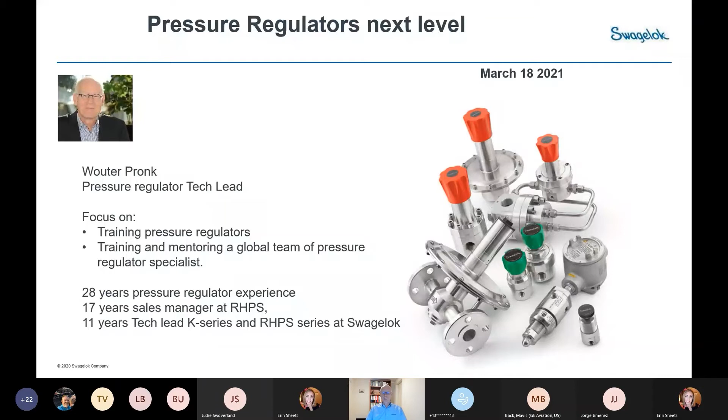So today we will talk about how to select correct regulators and things we have to be aware of. Is there a difference between liquid and gas? Of course we know what liquid is - if I drink my tea, that's a liquid. Regulator preventive maintenance is also important to know. We'll talk a bit about tank blanketing, and I'll show a little about the RHPS series versus the K series. I'm not going to do a sales talk - that's a job done by your sales and service center - but I just want to put some of our regulators in the spotlight so you can remember them.

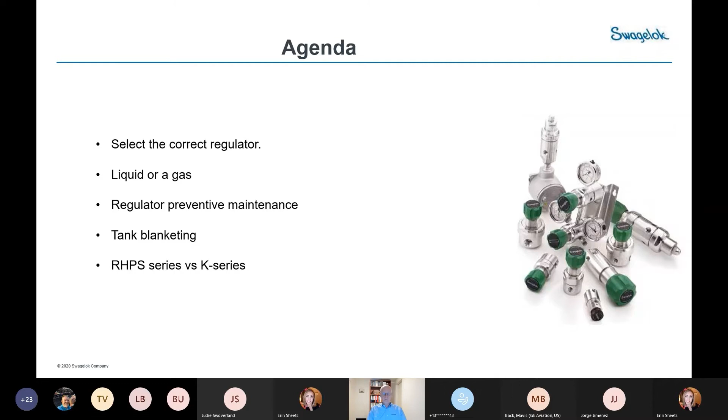So if you select a regulator, what is your selection criteria? It's very important that you select a regulator based on correct information. That sounds weird, but very often when talking with a customer about an application, I hear the word 'I think.' And if we start selecting a regulator because we think we know what is correct, basically we should know the correct process information - pressures, temperatures, flow, material compatibility - that's all very important.

It's also important that we know what we want to control. Do we want to control the upstream or the downstream system? Is that regulator reducing high pressure to low pressure, or is it the other way around? It's nice if you understand a bit about the natural behavior or performance of a regulator. We all wish we had a regulator connected to a high pressure source, set at 5 bar, which gives a fluent 5 bar outlet pressure. Unfortunately, it is possible, but then we have to do a lot of extra things. If we talk about standard regulators, we will see lockup, droop, supply pressure effect, and we will go through them.

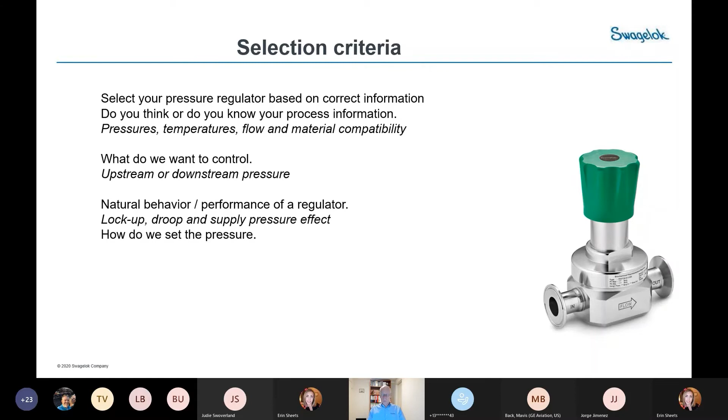So before we start talking about regulators, I always try to explain how a regulator works. The principle behind it is basically balancing of forces. Inside a regulator, we see several forces. The first force is the one we all know - I don't have the correct regulator in front of me, but if we turn the set knob, we compress a spring. That's the force everybody knows, the force everybody will recognize.

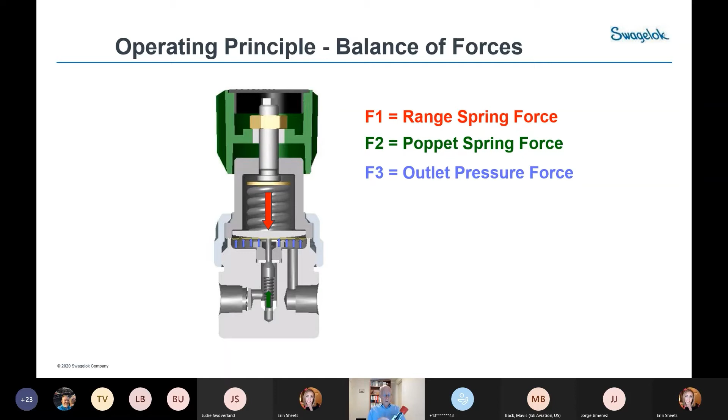Then we have the poppet spring force. Inside the regulator is a poppet, and that poppet should be against the seat. It can be done by a spring, and in the way we do it, it can be done with a tight diaphragm. But in our regulators, there is a force created by the spring - that's F2. And then we have a very important force - that's the force which is basically the outlet pressure, the force we try to achieve, which is pushed against the diaphragm. So the diaphragm will see the outlet pressure.

And then there is another really important force, that is the inlet pressure force. You can think about the situation where your high pressure inlet, which is 6,000 psi, is going to a regulator. The regulator will receive that 6,000 psi at the inlet, and it will push the poppet into a seat. So there will be pressure over there, and over the area of the seat, there will be created a pressure. That's what we can calculate by multiplying the area with the pressure, which creates a force.

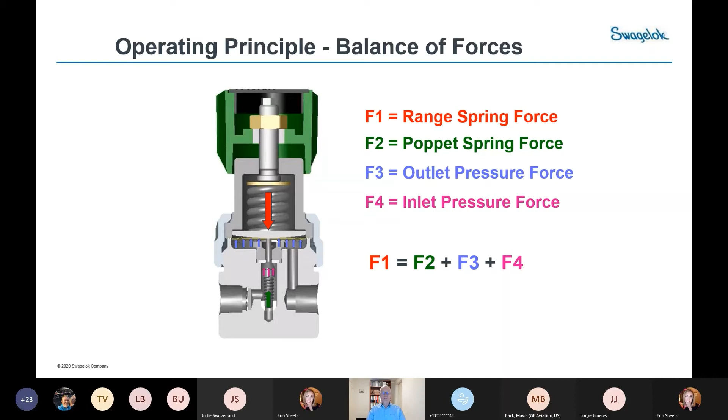All these forces should be in balance. So F1 is equal to F2, F3, F4. If we change one of the forces inside the regulator, something will change. And I keep telling you, if you are on top of this equation, you can explain most of the performance issues within the regulator.

Very often we like to use the regulator in the flat area of the flow curve, or maybe I should say a relatively flat area, because there is an effect called droop, which makes the flow curve a little bit sloped. So we start at the lock-up area, then we run into the droop area, and then we run into the choke flow area. That's really the end of the capacity of a regulator. You don't want to be there. If you want to use a regulator at that point, it's better to buy an orifice.

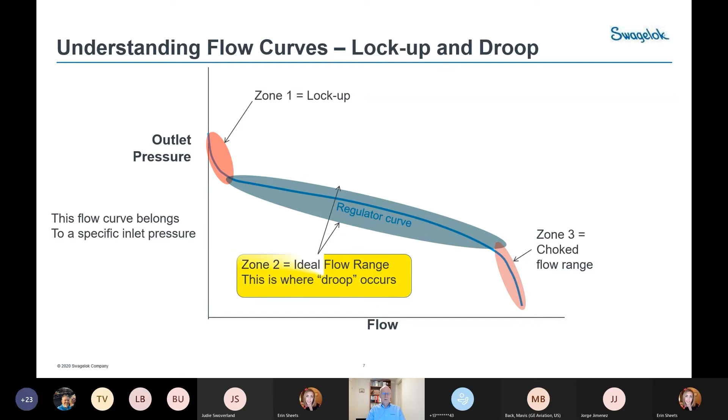And so all this information brings us to the point where we can start selecting a pressure regulator. And believe it or not, if I ask in a conversation what is your process data, and I write it down in my notebook and start working on it, or I give you this form and let you write down all the information we need - before you write it down, you will check it. You didn't check it when I was asking it. So basically writing down the information brings us to the point where you give me the information, you sign it off, and we can select the correct regulator.

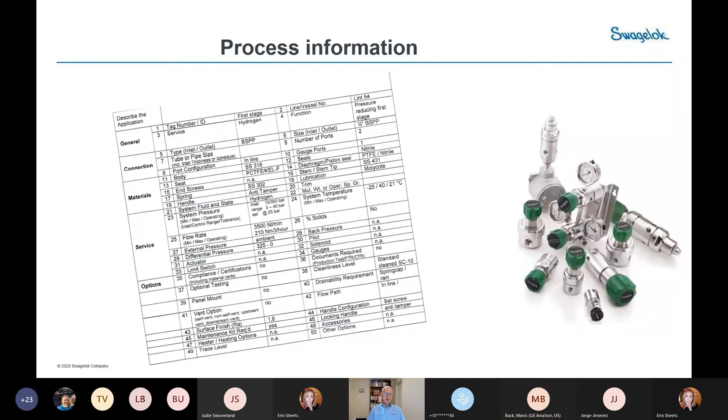Which kind of effects can we see inside this application? So first we can see lockup, and I will go through it. What is lockup? If somebody opens the valves over there, the first effect we will see on a regulator is lockup.

Then we see supply pressure effect. If the pressure inside these cylinders goes down, and you set your pressure at 15 psi, your outlet pressure will go up. So supply pressure down, outlet pressure goes up. It's against your feelings, different than you expect. Normal people, when I started in regulators, I did expect that if inlet pressure drops, outlet pressure will drop as well. But it's the other way around, and it's all to do with balancing of forces.

We will see droop effect in the process. We will see Joule-Thomson effect downstream the regulator because of compression and decompression.

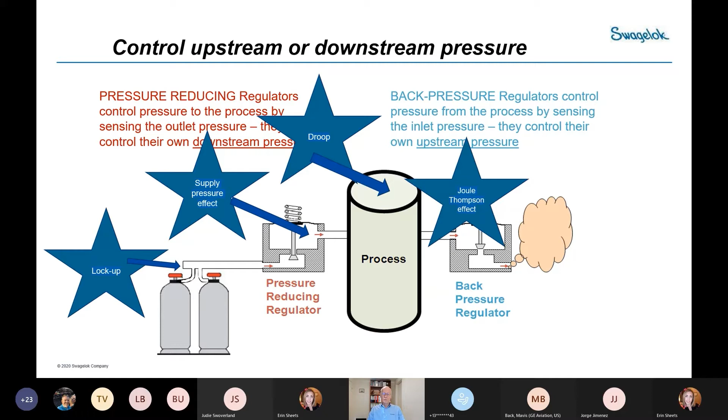So to start about lockup. What is lockup and how can you recognize it? So to show on this panel, you see the regulator which is set at a certain pressure. In this case, it's approximately 15 psi.

This valve is closed at the moment. If I open this valve, this gauge will show that the pressure drops downstream. So downstream the regulator, there will be a sudden drop, and that's what we call lockup. I hope it will work.

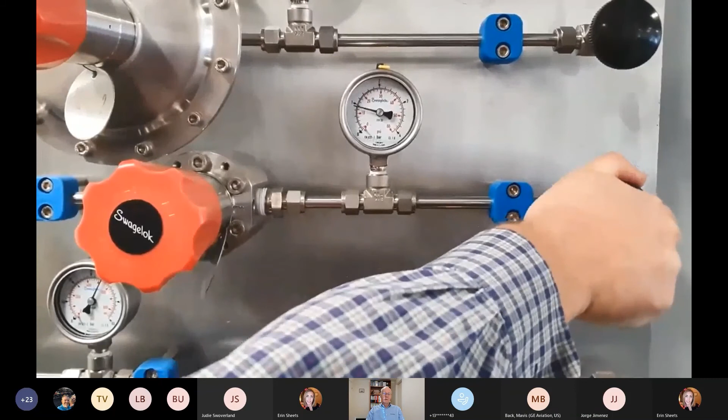So we open the valve, and this is a regulator which is a little bit prepared, so it shows a lot of droop. But this regulator is not broken. This is a normal performance effect which you can see inside the regulator. So we call it lockup.

You can imagine that if you're using a regulator in the lockup area and there is a little bit of flow, because the lockup only shows up with a little bit of flow, that you might have a performance issue in your system.

Where can we find lockup? If you go to the published flow curves, which you can find in our documentation, it's difficult to identify the lockup. If you go for a CTR, like we call it, so customer test report, to be sure that your regulator is doing exactly what you want, we can make this flow curve more precise. And on this one, you can see that lockup shows up and is over at something like 0.15 standard liters in a minute on this specific regulator.

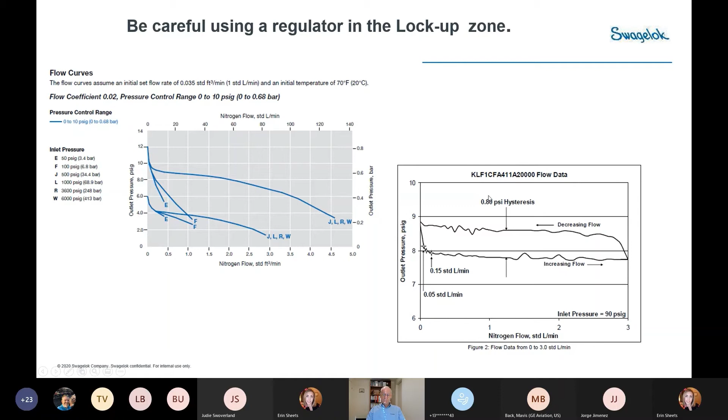You can imagine that if you are working with regulators in an analyzer system and you've got a flow to the analyzer or from the analyzer, which is really low. And I found this example because we also do site evaluations, and I found this example where the flow from the analyzer or to the analyzer was 12 liters per hour, which is 0.2 liters per minute. So you can imagine if this is the only flow which is controlled and set by a pressure regulator, you will have an issue. The pressure jumps up and down, your analyzer gets all kinds of different pressures.

So what is this customer doing? They created a bypass, or they created a little bit more flow. So it's always important to know if there is lockup and the flow is really steady, you will get a steady pressure. If you are fluctuating with your flow, then you also see fluctuation in your set pressure.

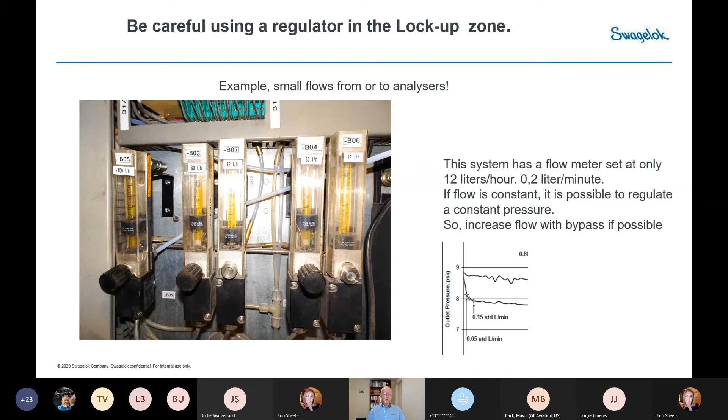So supply pressure effect, inlet dependency. I introduced it already. If the pressure in a cylinder drops, the outlet pressure goes up. Or if your inlet pressure goes up, your outlet pressure drops. So it's a balance. Inlet pressure down, outlet pressure up, and the other way around.

Think about a situation where you are running a process. You've got a cylinder, you start with 200 bar inlet pressure. You want to have 5 bar outlet pressure. Sorry for the bars, I'm mixing PSIs and bars up, but that's a European habit. So if I have a set pressure 200 bar in, 5 bar out, and my inlet pressure drops over time, the outlet pressure will go up.

And if your operator looks at the gauge and thinks, 'Oh, I have to correct this,' then he will turn the knob on the regulator a little bit backwards. So he corrects the pressure. But what if this cylinder is fully empty and he puts a full cylinder in place? What he does, he creates a high inlet pressure, and because a high inlet pressure will create a lower outlet pressure, you already did decrease the setting of that regulator, so your regulator will not give any flow.

So customers on the phone, like, 'Sorry, Swagelok, your regulator is not working well.' If we start talking about supply pressure effect and we explain what you did, you understand it.

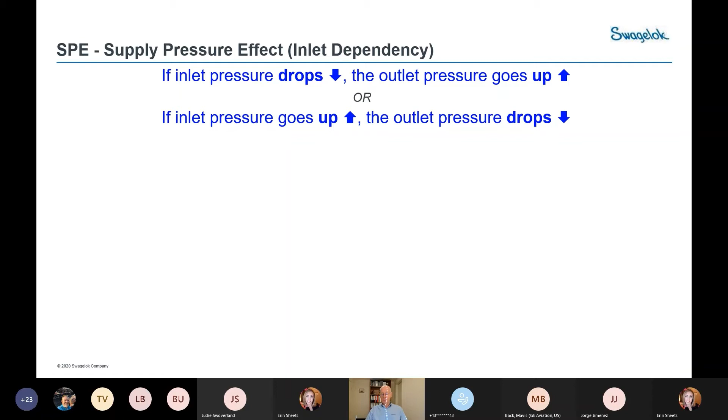So again, it is all to do with the forces inside the regulator. So the F1, F2, F3, and F4 force. So there's something changing inside your regulator. So if one of the forces, and in this case the inlet pressure force, which is basically the F4, that's the force against the poppet.

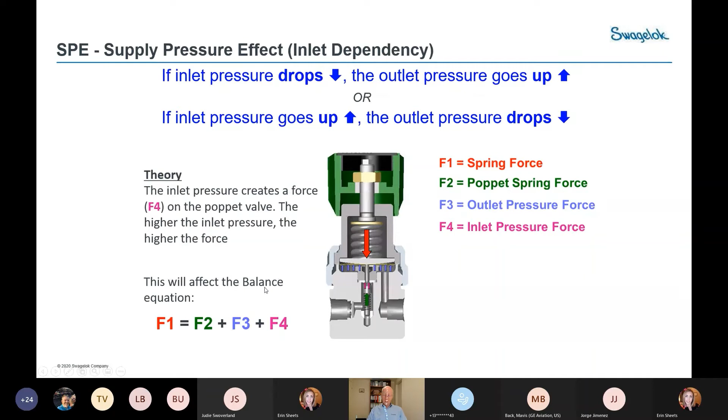If that's changing because your inlet pressure drops, so basically the inlet pressure force, that's number 4, is changing, is going down. I'm not touching the spring, the set spring. So there's only one thing which can change. That's the F3, the outlet pressure force. If this one force goes down, this one should go up, otherwise the balance is gone. So that's a quick explanation of supply pressure effect.

I've got a video which shows this. This is a pressure regulator which has an inlet pressure which declines from 34 bar to 6 bar. Outlet pressure increases from 1.6 to 2 bar. So if you look to the pressures...

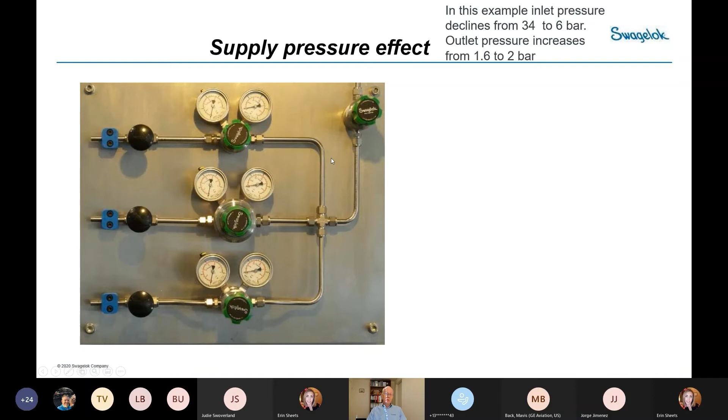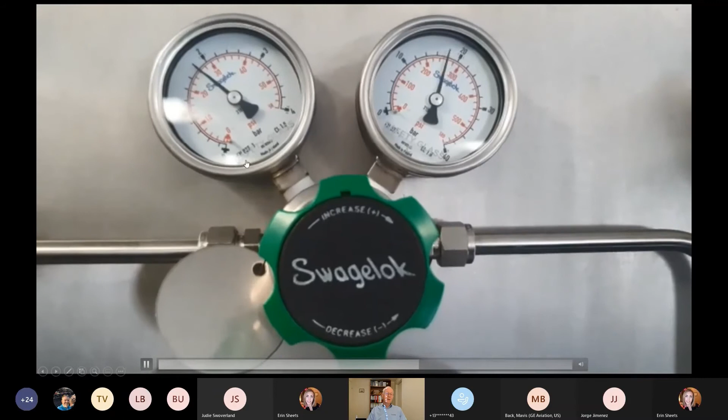So we are decreasing the pressure from approximately 450 psi. That's the inlet pressure, flows from left to right. And you can see that your outlet pressure goes up to a higher pressure. Supply pressure effect.

How can we calculate it? If you go into the documentation, you can find, for example, a KPR, a Swagelok regulator, small 1/4 inch inlet and 1/4 inch outlet, has a supply pressure effect of approximately 1%. So if my inlet pressure is set at 3600 psi, my outlet pressure is set at 50 psi. If my inlet pressure drops 1000 psi, then outlet pressure goes up. 1% of 1000 psi is 10 psi, so my outlet pressure goes up to 60. Simple calculation, but the effect is there.

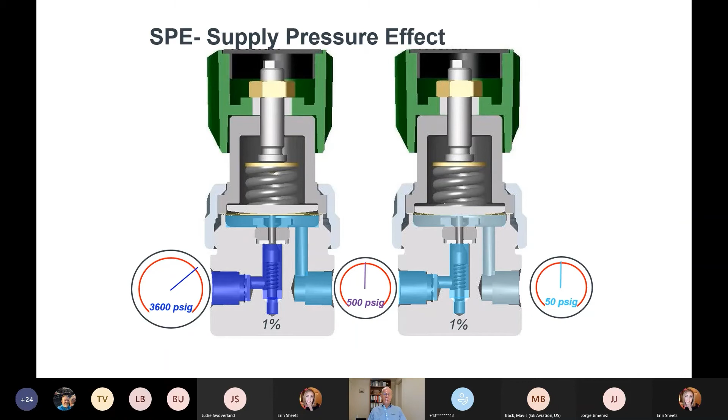How can we get away from this? We can do this by putting 2 regulators in series. So we've got an inlet pressure at 3600 psi, this outlet pressure was set at 500 psi, and my final pressure is set at 50 psi. So my total supply pressure effect will be 1% of 1%. If we look to the effect here, inlet pressure drops, in this case 2000 psi, outlet pressure goes up 20 psi, so it goes up to 520. Hey, that's funny. So the second stage will see pressure going up, so my last stage will see pressure going down. With dual stage reducing, you can prevent a pressure rise due to supply pressure effect.

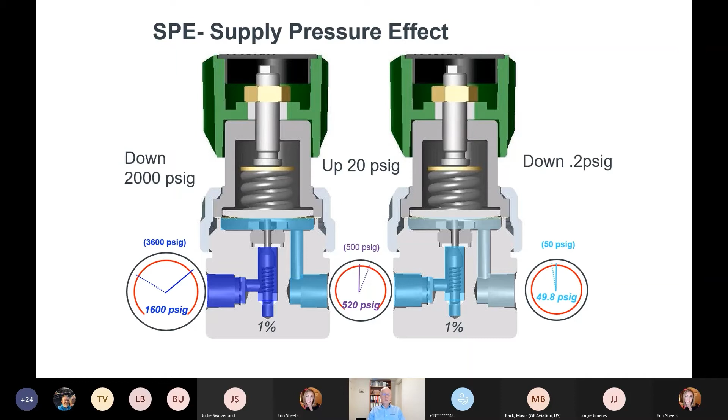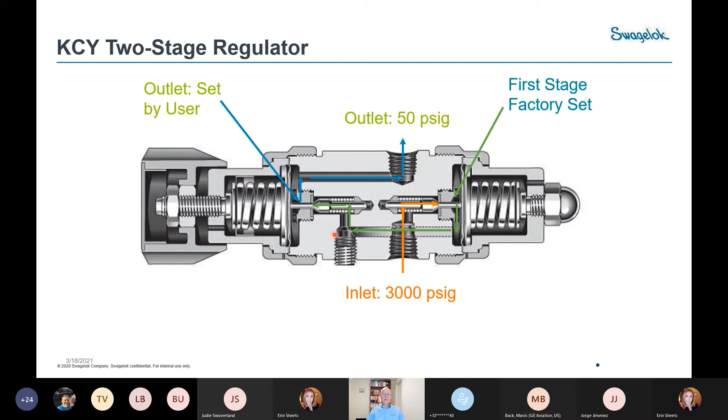So we have a solution which is the KCY, that's 2 regulators in the body. We have a first stage, and the first stage brings the pressure to the second stage, and the second stage reduces the pressure to the final outlet pressure. This is a very compact solution. To build this on panels is not always convenient, especially if you want a vent option, a self vent option on this spring, so in case the diaphragm breaks, you want to vent off to a safe place. Same on this side, if you want an extra connection on this side, this regulator gets quite long and it's difficult to build on a panel.

So we have a standard solution which we call the SGP program, gas delivery program, and we can build this kind of panel in our CS department, custom solutions. So we have a fixed set pressure first regulator, and we have our second stage on the panel, and we have all kinds of regulators around it. We have a safety valve on the panel. So this is another solution we can supply to you. Gas delivery program - I think you already had a presentation on this, so I will not dive too deep in there.

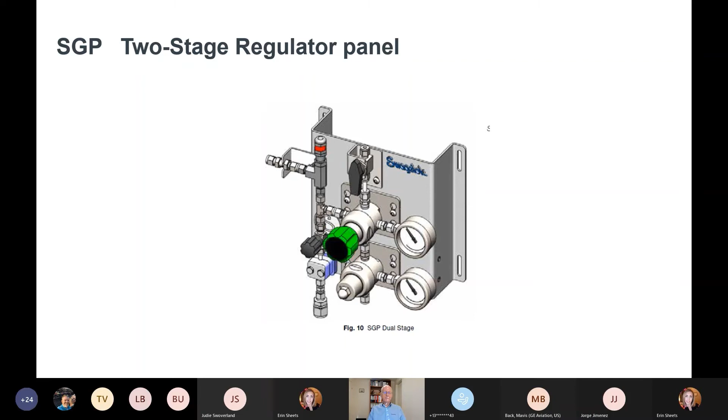Then the other effect is talking about springs, so regulator flow increase and droop. If you look to this regulator and the spring, and especially focus on this area, you see a spring which has a certain length because it's compressed by the set screw. If we increase the flow downstream, then the pressure will drop over here. This valve will go open, so the valve goes down, the diaphragm goes down, the diaphragm support plate goes down, and the spring gets longer.

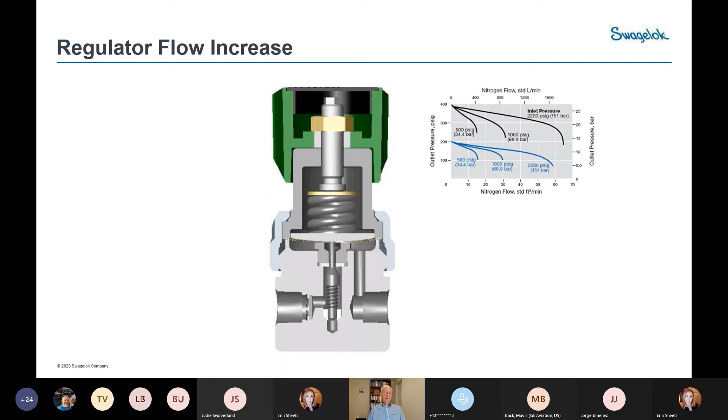What is happening with the spring? So my spring gets longer. What's happening with the spring which gets longer? This one will lose force. So if there's less force on top of my diaphragm, you will see that effect in the outlet pressure. So again, this is back to the equation. What is changing? The F1 is changing. F1 goes down, so something at the other side will go down as well, and the only thing which can go down is F3. The spring inside the regulator is a very important part of a regulator, so always select a regulator with the correct spring. We'll come back to that later.

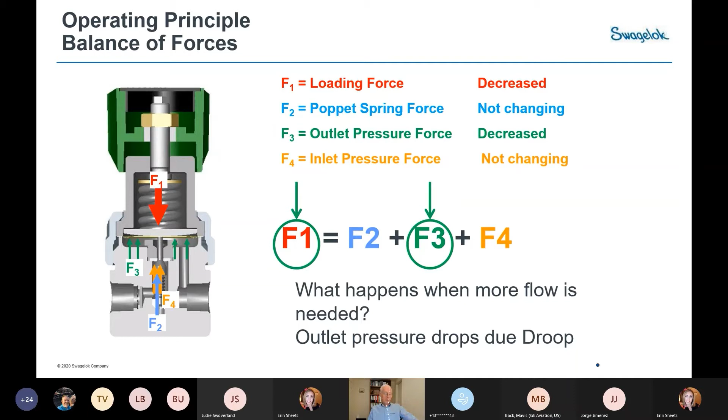That's the next slide. So if you select a spring, always select a spring which belongs to the set pressure range you want to work with. If you think you're going to standardize on one regulator for all your applications on site, so you want to control like 15 psi, 20 psi, or even 40 psi with one regulator, you make a mistake because you get a spring which is too strong. Instead of getting the weakest spring, you get this strong monster, and this strong monster will give you more droop than you want to see. So my advice is always select a regulator which fits to your application. If you want to control 100 psi, select the one that is 0 to 100 psi.

You will not have an issue like with the gauge. In the gauge, you would like to see the needle up at 75% of the scale. Regulators, you can use them across the full set pressure range. These regulators are built with some extra capacity, so the maximum set pressure of a regulator in this case is not 0 to 100 psi. In the static situation, it will be set with 10% extra, so you can always use this regulator across the full scale.

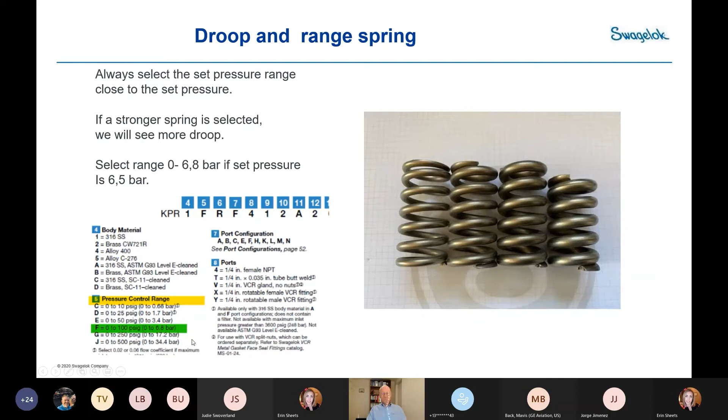So I was talking about the flow curve, and a lot of people say, hey, this is a flow curve of a regulator, it looks good. So what is the optimal flow curve for this regulator, and what's the optimal flow range? A lot of people tend to say, in the area where it is flat, I can use this flow curve, or I can use the regulator which is connected to this flow curve.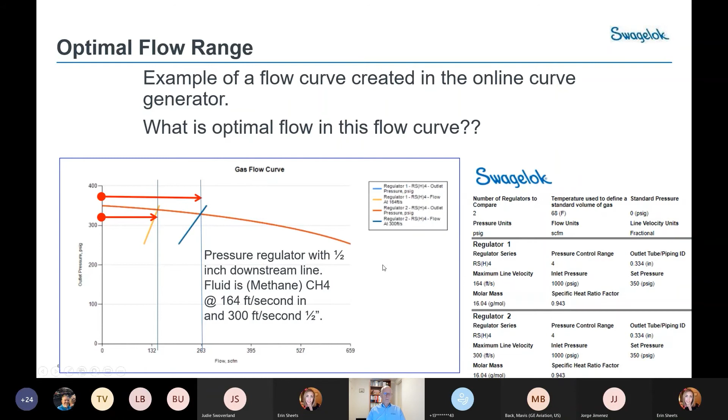Joule-Thomson effect. The Joule-Thomson effect is always there in regulators which are reducing pressure from high to low. There will be a little bit of temperature drop. The temperature drop will be based on the pressure drop, and the amount of freezing you will see depends on how high the environmental temperature is, how much energy is there in the lines, do we have a heater up front. This is something you need to take into consideration.

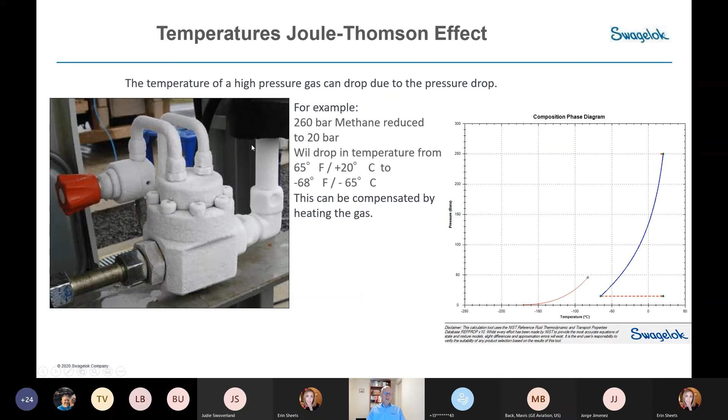I very often get questions about liquid or gas flow calculations. Is there a big difference? Yes, there is a lot of difference. Is there a big difference in how we approach calculations? Basically, not too much. If we do a calculation, and this is an example of a regulator, it looks very much like this one. We first calculate the size we need for the seat in here. And then, based on the industrial standard velocity downstream the line, we calculate the size of the downstream line.

The calculation of the seat is done with industrial standards, done with pressure differential. And the downstream line in the gas system is done with standard velocities in the downstream line.

So if we take the two calculations side by side, in a gas calculation, the flow at the seat is based on differential pressure. If there is a big differential pressure, say from 200 bar to 5 bar, it's an easy job for the regulator. But if the inlet pressure comes really close to the outlet pressure...

...then we can get into a situation where we go from critical flow to subcritical flow. A subcritical flow is where the inlet pressure is really close to the outlet pressure, with a small differential pressure. That can mean you have to correct a lot of things on your flow.

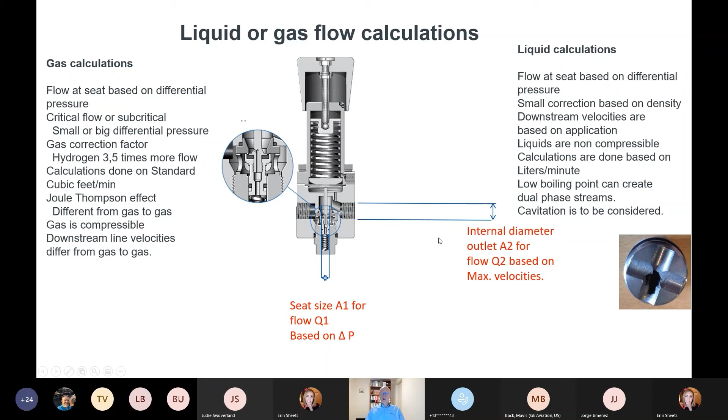That's not really nice for regulators -- regulators don't like dual phase streams. And also what we see in regulators in liquids is cavitation, and cavitation is really bad for regulators. So you see over here, this is an example of a part inside the regulator which was eaten away due to cavitation in a few hours.

And the other thing we need to take into consideration, if we talk about a regulator which is over here, and you look at the connection in the regulator, this is a 3/4 inch connection. If we put a fitting in there, we are reducing the outlet pressure, so we are also reducing your downstream line. So the internal diameter of the downstream line is not really big.

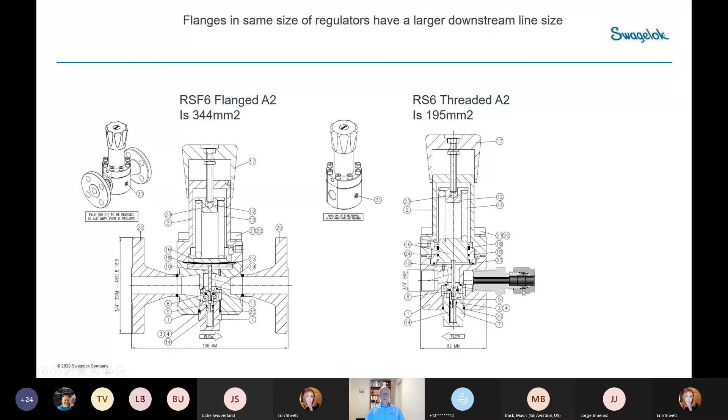If we connect flanges to the same regulator when we have high capacities, then the internal bore of the line is bigger. So the capacity of this regulator in the downstream line is bigger than if we worked with tubing. So this is a 3/4 inch regulator connected to piping, and this is a 3/4 inch regulator connected to 3/4 inch tubing. So there is a capacity difference.

I always get questions about regulator maintenance, and I would like to talk a little bit about it. If people ask me, 'Wouter, what can I do, and what is the best frequency for maintenance on site? Do we need a plan to do maintenance on regulators?'

I've got customers who are using regulators for years, and the customers forget that they even have this regulator, and that the regulator is working well.

Because it is in a nice, clean application. There is not too much Joule-Thomson effect, there is no abrasive fluid in the regulator -- it's not a liquid, it's a gas. Especially on high purity systems, it's extremely clean. So if regulators are used in a simple application, they will last forever.

If you want to do maintenance on a regulator, my advice is always, if you're not sure how difficult it is, open the regulator after half a year. Start somewhere, try to figure out how the regulator looks. If it's still in good shape, then you can continue for another period. So you will find your maintenance intervals yourself.

My advice is always, if you want to do maintenance on a regulator, never ever open a regulator without having spare parts available. So you can order spare parts for the K series and also for the RHPS series. There are good manuals with it, so it's not too complicated. And on the K series, you need to buy some extra tools, and with those extra tools you can create the necessary torque when building it together again. So the tools can be ordered.

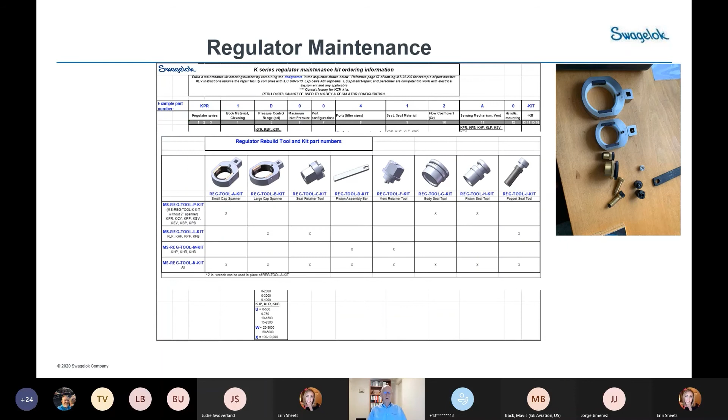And then in each regulator manual, we also have troubleshooting. So if somebody is asking me like 'this is happening,' then I ask questions, and basically this is a problem, the reason why, and the solution. So if the regulator has what we call creep, or leakage, then it's very normal that we change the seat, so replace the part inside the regulator. And in this way we can go step by step through a regulator to repair stuff.

But maintenance is part of a regulator's life. It is a mechanical instrument, and it's possible to send in regulators which do not perform as expected. I'm not sure of the exact number, but I've heard that 95% of the product returns we get are based on contamination. So systems are not always as clean as you expect. Installation people and integrators are not always working as clean as you think. A small burr can create damage on the seat, which creates a leak.

So maintenance is part of the regulator life. How can we prevent it? Use the correct tools. Put filters inside your inlet. Work with filters inside your lines.

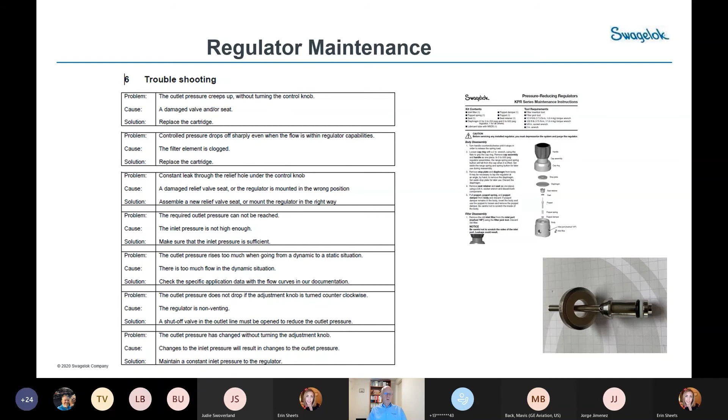Another thing that's very actual at the moment, and which we talked about in an earlier training, is our GDS program. Swagelok runs into a lot of questions where customers ask us: what do we need at the supply point? Do we need a bottle rack, or do we work with a single regulator? What kind of manifolds do we need? Where do I reduce my pressure - at the bottle rack or at the point of use? Do I need an auto changeover panel at the bottle rack? So, to figure out what you need, these are the things I always take into consideration.

First of all, and that's the most important part, system safety - to protect your people. I think that's really important, that everybody has a safe working place. And it's also good that the system is protected, so that if there's some leakage inside the regulator, it's always protected with a safety valve.

The safe routing of lines - always keep gases separated. Very often you see in corridors, in labs, where you walk to your labs, you look at the ceiling and see all the lines coming there. It's not very safe to have explosive gases and oxygen all in that area. So try to keep the lines which are dangerous in a good position, in a good routing. Keep your gases separated, and also the lines separated by type.

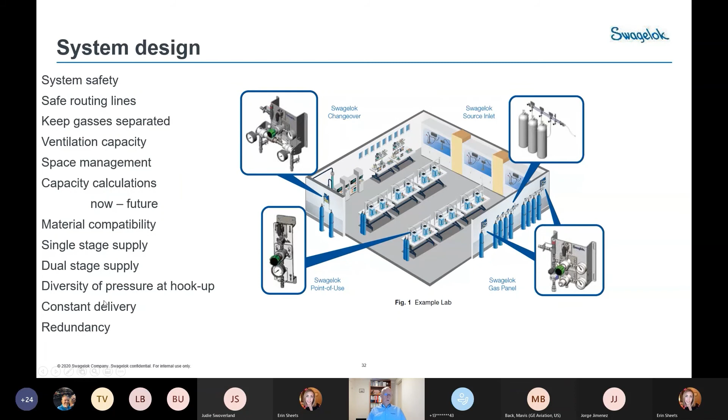These are the questions I get a lot, which have to be taken into consideration.

Then there's a question I get a lot about: hey, how do I control my regulator? This type of regulator is very often in use, so you set the spring with a knob.

The other option is to work with a dome loader. A dome loaded regulator is basically the same body you see here, but then there is a dome on top.

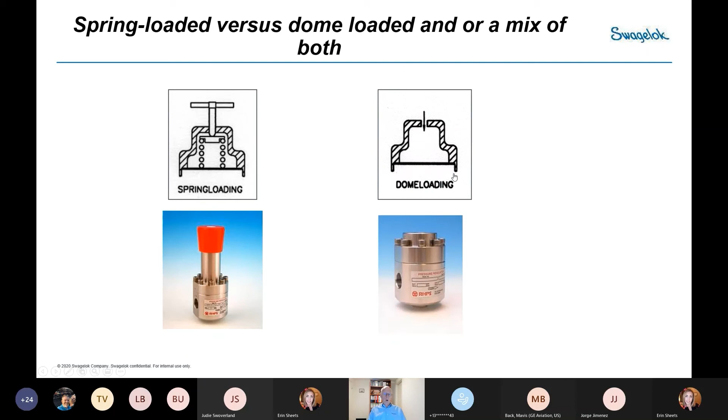So if you want to work remote, you can bring in gas here, and the pressure you put in, like 5 bar, will be approximately the outlet pressure. Dome loading gives a few advantages.

How does it look like? This is a dome loader, and I was asked to present a bit about the RHPS series. This is a typical dome loader - you see a nice 1.5 inch stainless steel dome loaded regulator with a pilot.

The pilot takes the inlet pressure, goes into the pilot, goes into the dome, and we create a dynamic leak to the outlet to have a constant outlet pressure. So we have a nice big diaphragm controlling the pressure.

If you want to control precise and accurate systems, and do it as good as possible, my advice is always: try to find the diaphragm which is as big as possible, and try to find the seat which is as small as possible. The combination of a small seat and big diaphragm will give you the best performance.

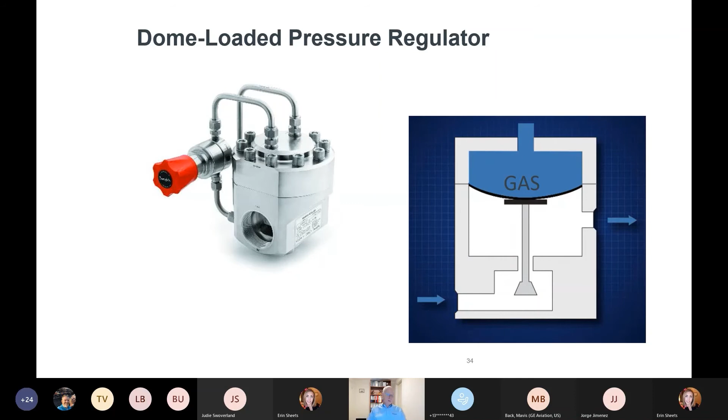So if it's possible to select the correct regulator, do so. And if you're used to working with spring-loaded regulators, you know that you start with a small diaphragm, and if the outlet pressure is high, you start working with pistons. So the diaphragm or sensing area gets smaller and smaller.

So how accurate is a piston regulator? Not really accurate anymore. That's why we designed dome-loaded regulators - you work with a full set pressure range with a nice big diaphragm.

So the ratio between diaphragm and seat is always big. That gives you a low supply pressure effect, and there is no spring, so lower droop, and remote control is possible. So if you have a test lab and a remote test in a bunker, you can control the regulator remotely.

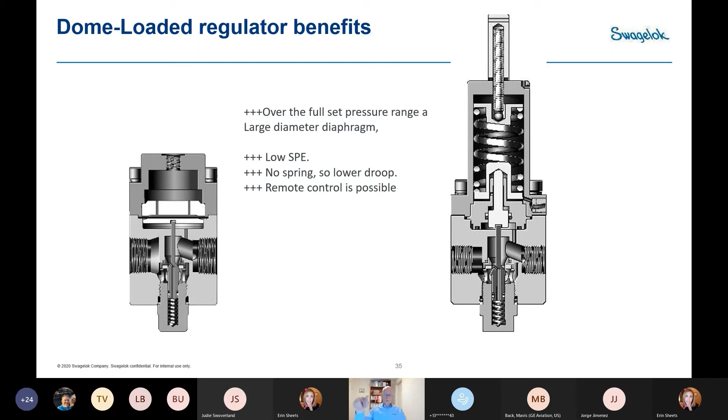One of the subjects I like to talk about as well is tank blanketing. Tank blanketing is basically having a storage, and in the storage there is very often a liquid, and you want to have an inert environment on top of that liquid.

We see a lot of applications which look like this, and people call this blanketing as well. So there is the fluid which goes in, so this level goes up and down. There's a vapor on top, and there's a fluid which goes out - this is to the process, and this is basically your supplier for the fluids.

People connect nitrogen to this side of the tank, put a flow meter in between, and they have a constant flow of the gas, and the outlet goes to a flare or a safe place. And they take care of a constant inert environment on top of the liquid.

If I see this, and I've seen it a lot, people say, yeah, that's the way we do it. And then my question is always, who's the happy person in this application? I can tell you that's the gas supplier - they'll be really happy about this, because they keep supplying the nitrogen to this system.

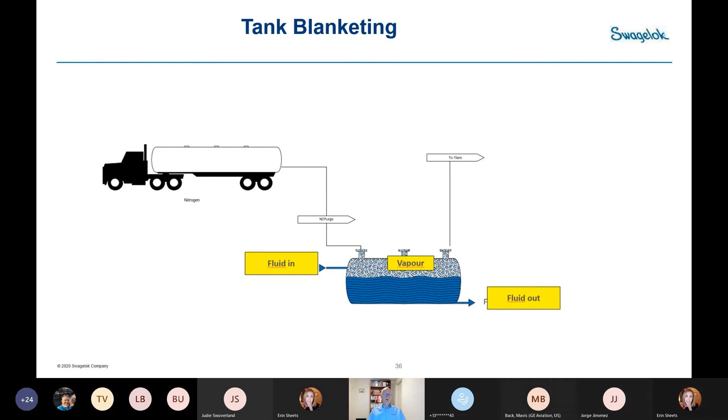So how do you get away from this? Very often I talk with customers and ask them, how much nitrogen do you use? They don't really know immediately, but they ask the purchasing department, and they find out that they buy a lot of nitrogen. So it's very easy to suggest building it a different way.

So if you have a tank with a fluid, your fluid goes in, fluid goes out, level goes down and up. If it goes up, the nitrogen which is in here will be pushed away to the safe place. If the level goes down, the blanketing regulator will supply nitrogen on top of the fluid.

We can always blame the purchasing department if they forgot to buy nitrogen - we'd have an issue. Think about a tank where the level goes down - you create a vacuum, and you don't want a vacuum in a storage like this. Storages like this are always very fragile.

Storage tanks like this want to be built as cheap as possible, with thin wall thickness. The pressures normally used in this kind of storage are low - 0.15 to 0.73 PSI.

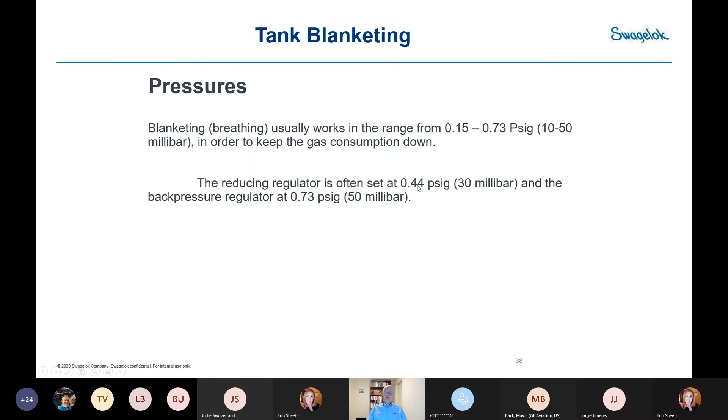So the pressures are low, and the reducing regulator is set a little bit lower than the back pressure regulator. This one is set at a lower pressure, and this one at a little bit higher pressure. If the level goes up, this starts venting, and if the level goes down, this one starts supplying.

The regulator on top is the vacuum breaker, which takes care of the situation when there's no nitrogen supply anymore and the level goes down. That creates a vacuum in the tank, and we don't want that because the tank can collapse - I have a picture later on. Then this valve will open and put atmospheric pressure inside the tank. It's not ideal, and there should be an alarm on that, but you save your tank - better saving your tank than having one implode.

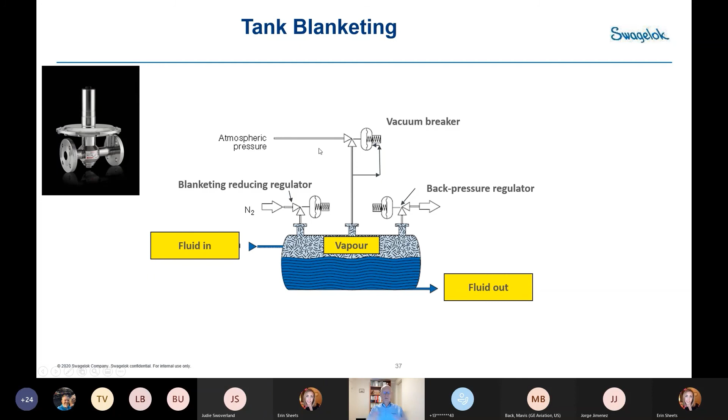So why do we do blanketing? To prevent air from entering storage or a vessel, to prevent an explosive mixture developing in the vapor space. For a fire or explosion, we need fuel, oxygen, and ignition. If you take away one of the three, you create a safe environment. Very often, if you take the oxygen away and replace it with nitrogen, you create a very safe system.

Air contains oxygen, moisture, and other contaminants which can lead to internal corrosion and degradation of the stored product. Think about a pharmaceutical plant where you have a clean process and want to keep it as clean as possible. You can control the quality of your nitrogen supplied by your gas supplier.

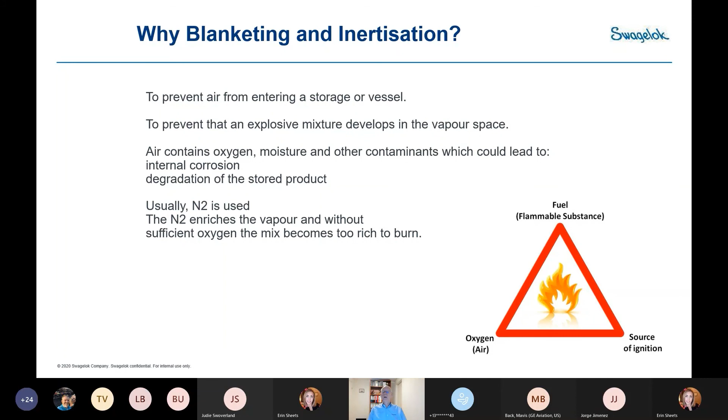Very often systems like this are vacuumized and filled with nitrogen repeatedly, sometimes 5 times, so they're 100% sure the environment is as clean as possible - achieving 99.9999% nitrogen on top. What's in such a pharmaceutical process is extremely expensive, so we want to treat it like gold - we don't want to see any oxidation of the product in the tank.

Another thing to think of - if we have a tank with low pressure inside, and it's nice and warm, and all of a sudden we get a thunderstorm and hail, we get a quick cooling effect, that quick cooling effect will create a vacuum as well.

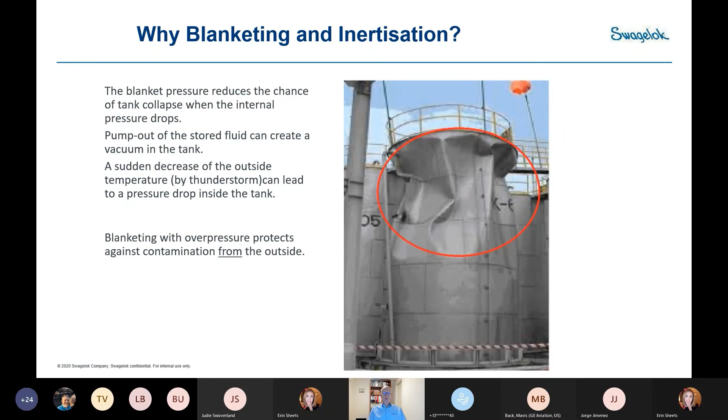So the calculation of the supply regulator should be correct. If the calculation is not done correctly, you can have a risk of implosions as well. If you have a small supply flow into the tank, you'll get a pressure that's too low and you can get this kind of situation.

What is a typical tank top? On a typical tank top, you will see regulators installed like this. This is the TBRS8 with 1-inch connections, and this is the TBVS8. V stands for vent, and the R in this name stands for reducing.

The regulators are installed with the diaphragms in a vertical position, not horizontal, and you can see why - they're set at really low pressures, and sometimes the weight of a diaphragm can already influence your set pressure. If installed like this, you have no influence from the weight of the diaphragm, and you also get good drainability of the installed valves.

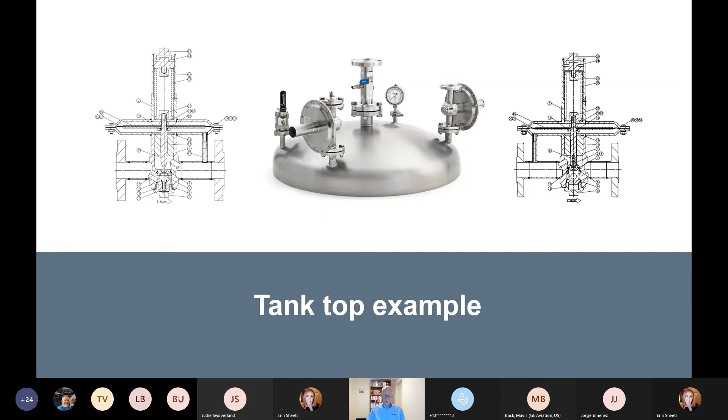So tank blanketing - pharmaceutical plants, small processes. In this plant, you see first the regulator doing the purging of the vessel, and this regulator takes care of the pressure in here.

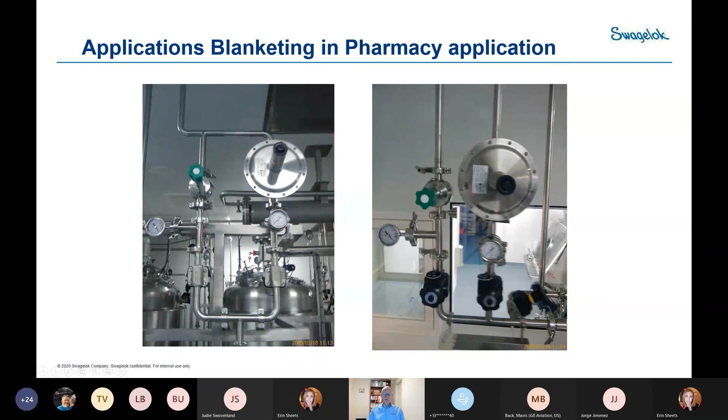What markets are we in with tank blanketing regulators? We are in the smaller market - smaller batch processing. We are not on the big tank farms; we can't replace the big carbon tank blanketing systems found on large storage tanks. We are in the smaller processes.

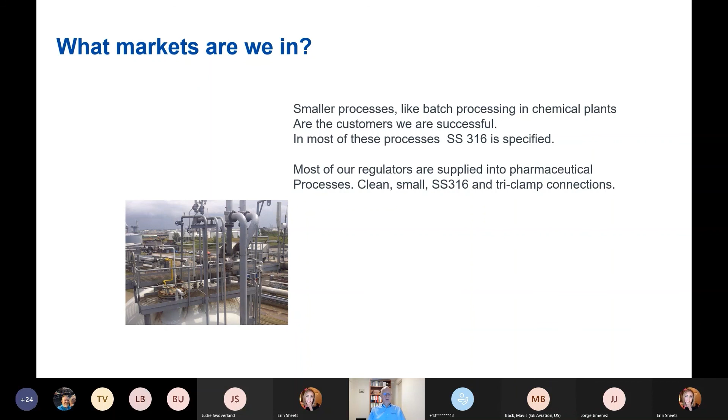So finally, I want to go a little bit over the difference between the two series we've got. So we have the K-series regulators, used in instrumentation. You see heated regulators, dual stage regulators, and we also have the process regulators, which are the RHPS series.

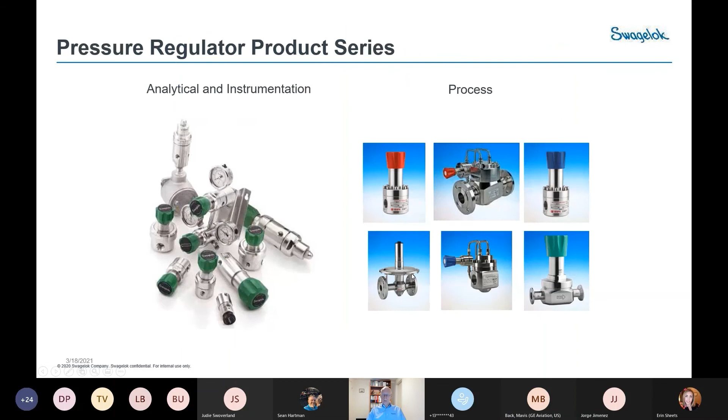This is the regulator I showed you on the table, a nice big dome-loaded regulator. We've got back pressure regulators, tank blanketing regulators, back pressure dome loaders, and a pharmaceutical regulator. So this is the overview.

Funny enough, if you look at this overview, a lot of people buy and open the documentation and stop at page 6. Why do they stop at page 6? Because they think this regulator can handle my inlet pressure and control my outlet pressure, so they select this regulator. But if they go one page further, you will find the KCY, which is able to do dual stage regulation.

So which can give you a better supply pressure effect. If you want to control a very low pressure, it's better to work with a KLF. So my advice is, we design different regulators for different applications. Try to find the regulator which fits your application - it will be very beneficial to do it that way.

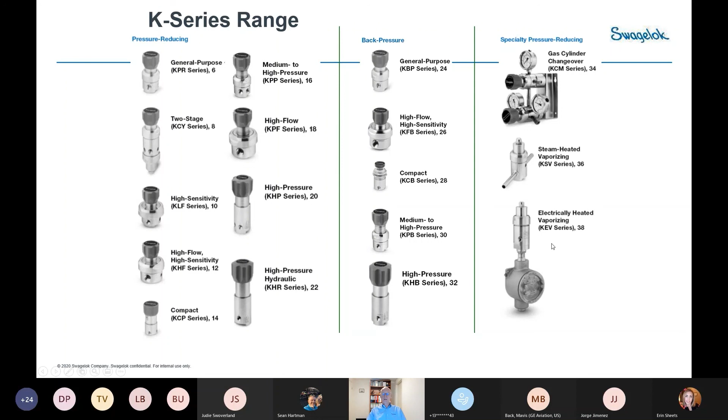So these are the pressure reducing regulators, these are the back pressure regulators, and these are the special ones. We have the dual stage regulators, we have an auto switch over system, and we also have heated regulators, the KV series. And for the RHPS series, we have the dome-loaded regulators and the back pressure regulators.

A lot of people ask me, why do we have red knobs and blue knobs? The red - that was my boss, he thought, 'reducing, that's red, the R from red,' and the back pressure regulator, B from blue, so we put a blue set knob on this. So this is a dome-loaded pressure reducing regulator, and this is a dome-loaded back pressure regulator.

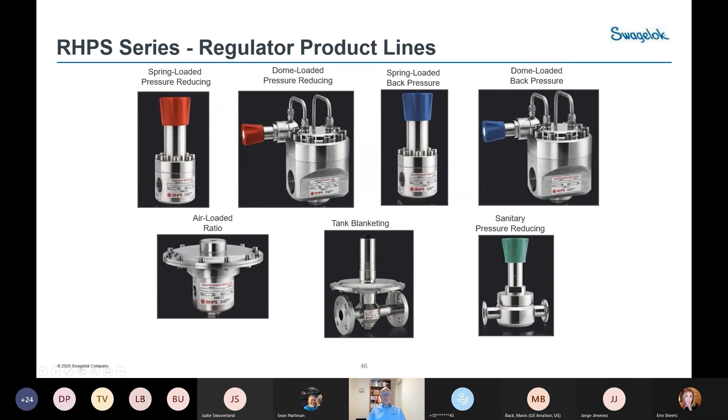This is an air-loaded ratio regulator. This is a tank blanketing regulator. This is a sanitary pressure reducing regulator. And I will highlight two regulators which might be of your interest.

So the RHPS has a differential pressure regulator, and the differential pressure regulator is a regulator which can be controlled by dome, by a reference pressure which you put inside the dome, but you can also set a bias. So this regulator takes care of the set pressure, which is, for example, 7 psi higher than a pressure which comes from a system.

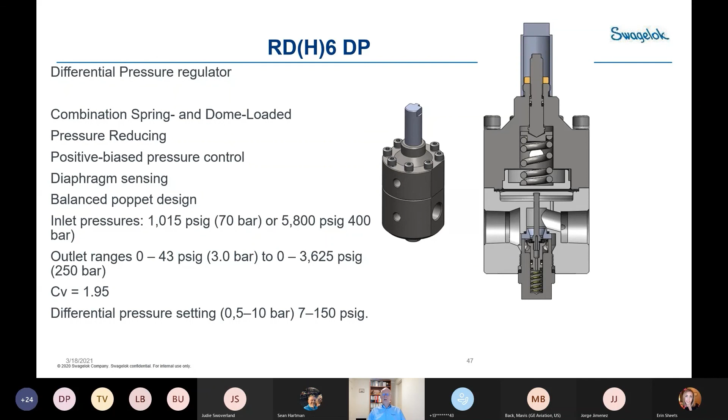So this is a regulator we sell very often in mechanical seal systems, especially on the dry gas panels, and in test laboratories. This one is used in test panels for testing engines and testing electronic parts, and also in our test benches on the Isle of Man, where the regulators are manufactured. We have something like 10 test benches, and all are equipped with this regulator, doing a hell of a job.